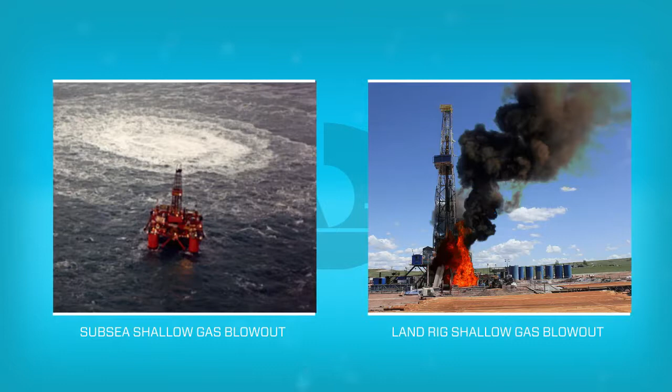Shallow gas blowout can occur in the early stages of drilling, even before the BOP has been installed. The picture on the left is of a rig that had a shallow gas blowout in the North Sea, and the picture on the right shows a gas blowout on a land rig.

In April 2010, the Deepwater Horizon rig suffered a blowout in the Gulf of Mexico, where an uncontrolled release of gas caused the rig to catch fire and sink. 11 personnel on board the rig lost their lives, and an unprecedented amount of damage to the environment was caused by the oil released from the well into the Gulf of Mexico.

The International Association of Oil and Gas Producers, IOGP, produced a document number 476 with recommendations for the enhancement to well control training, examination and certification. This document outlines the recommendations for the standard of well control training in the industry in order to help prevent future disasters from happening.

We will now describe some of the main topics associated with well control.

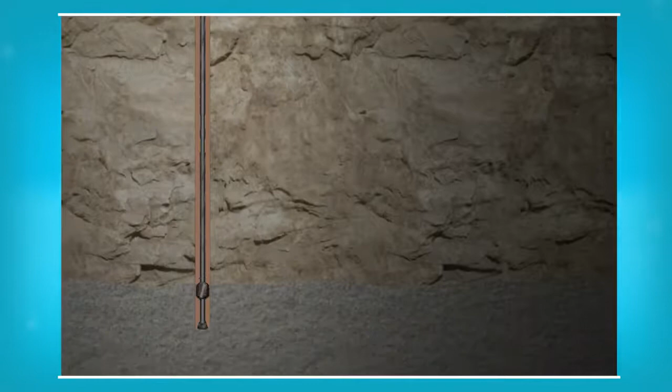In the wellbore, gas, oil and water are held in the pores of the rocks. To prevent these escaping, drilling fluid is used in the well. The density of this fluid is carefully calculated to be high enough to hold back the formation pressure and low enough not to damage the formation. This is known as hydrostatic pressure.

The fluid is constantly being circulated and monitored while drilling. The weighted fluid is classed as the primary well control. If the hydrostatic pressure gets too low, below the formation pressure, the gas, oil or water can escape into the wellbore, posing a potential threat to the well and the rig. This is known as a kick.

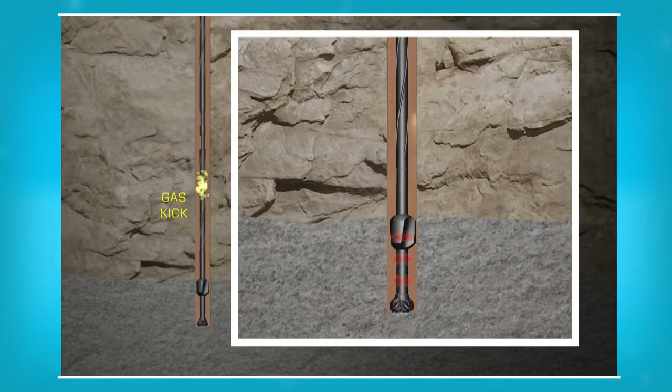There are warning signs at the surface, such as increased return flow rate or an increase of drilling fluid in the fluid tanks. We need to minimize the size of the kick by closing in the well as quickly as possible.

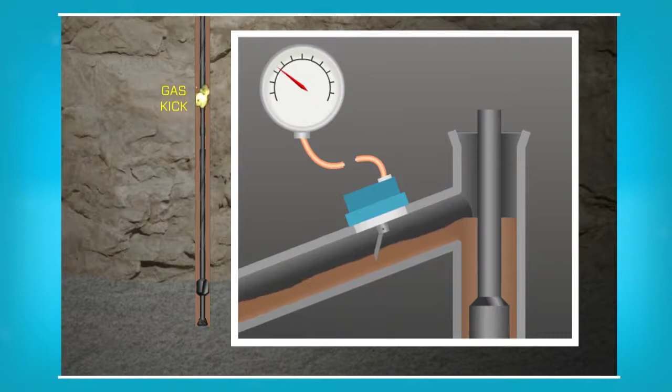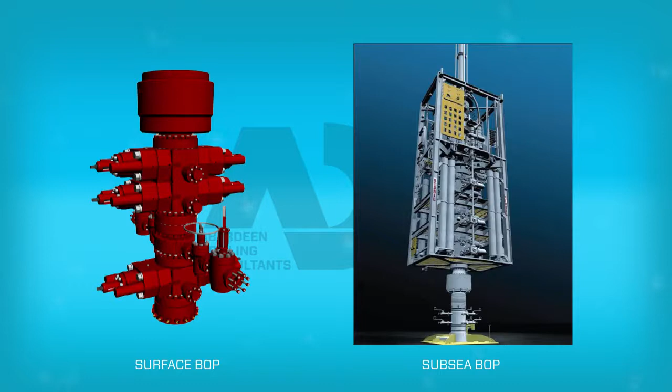If a kick is detected or suspected, the secondary well control is used. The blowout preventer, BOP, is used to shut in the well. The BOP is a large stack of valves. These are closed to seal the well. The BOP has choke and kill lines which are used to monitor and control the pressures of the well.

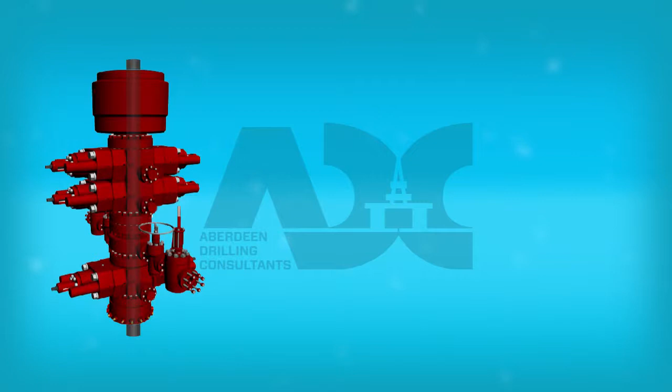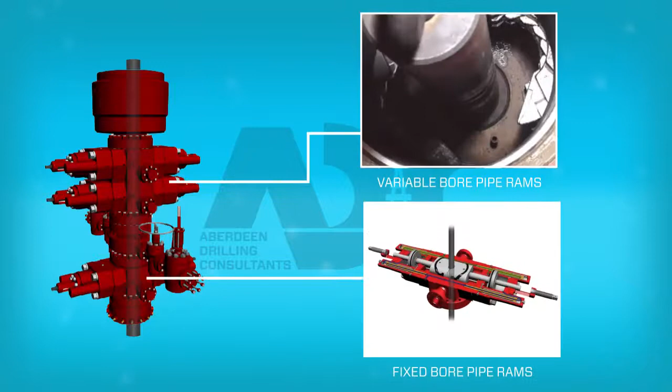The blowout preventer has various equipment for closing in the well. It has an annular preventer which can close around different sizes of tubulars, fixed or variable size pipe rams for closing around drill pipe, and blind shear rams which can cut through the tubulars in an emergency and seal the well.

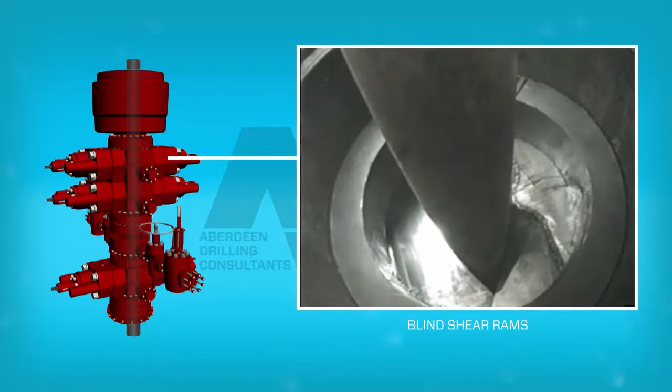Once the rams are closed, they have a locking device that holds them closed in case the hydraulic power is lost. To shut in and seal the well, the annular preventer is closed around the tubular. To further seal the well, the pipe rams are then closed.

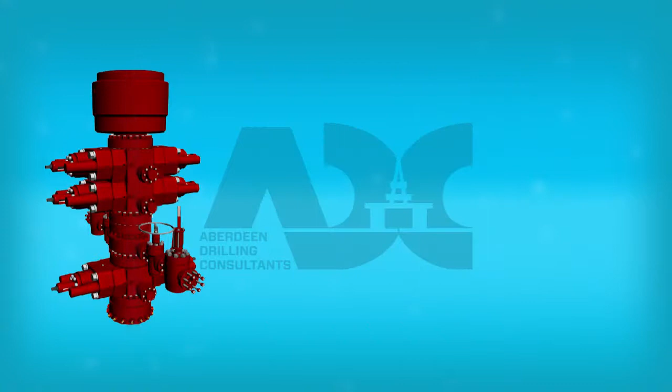We also have to close in the drill string so no fluids can escape up through the tubulars. To stop the flow up the drill string, a drill pipe safety valve is installed on top of the tubular. Once tightened, the ball valve can be closed using a special Allen key to seal the drill string.

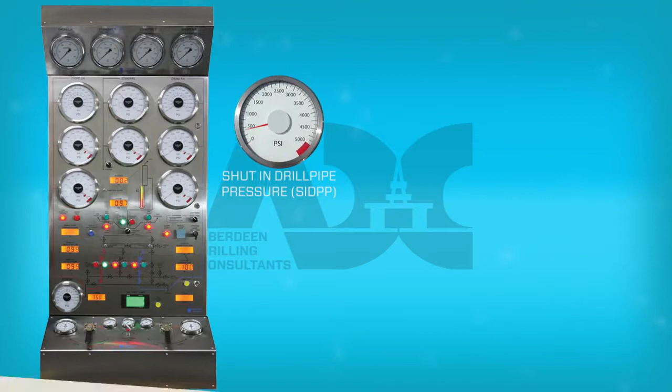Now that the well is shut in, certain values have to be taken to be able to calculate the required information to kill the well. This is done by reading the shut-in drill pipe pressure, SIDPP, and the shut-in casing pressure, SICP, from the gauges on the choke panel. The amount of fluid gained is also recorded, and this information, along with the well information, is inputted onto a kick sheet.

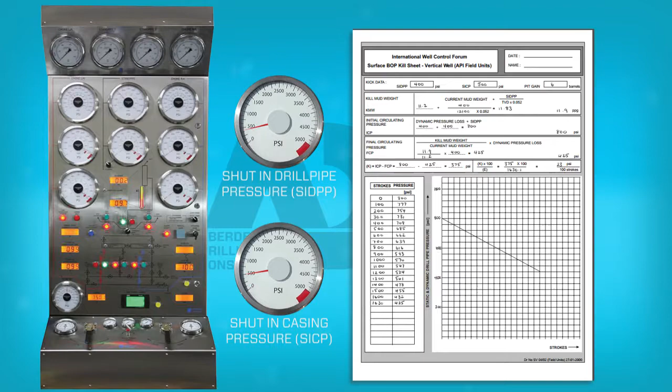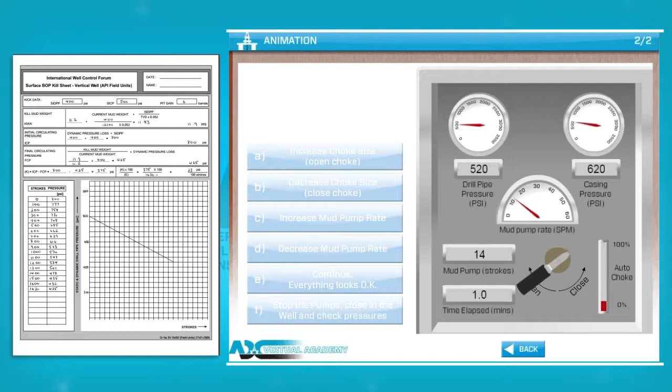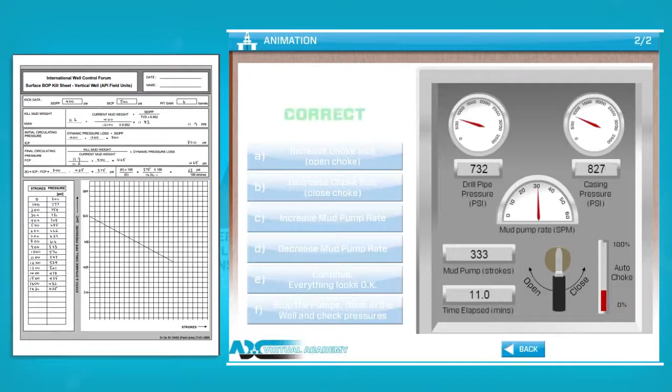This calculated information is then used to kill the well with the weighted kill fluid. To kill the well, we now use the values taken from the kick sheet. In this example, we are using the wait and weight kill method. This is done by following the graph on the kill sheet. This graph represents the kill fluid being pumped from the surface to the bit. The pressures are maintained by operating the choke on the choke manifold, which is being controlled from the choke panel in the driller's control station.

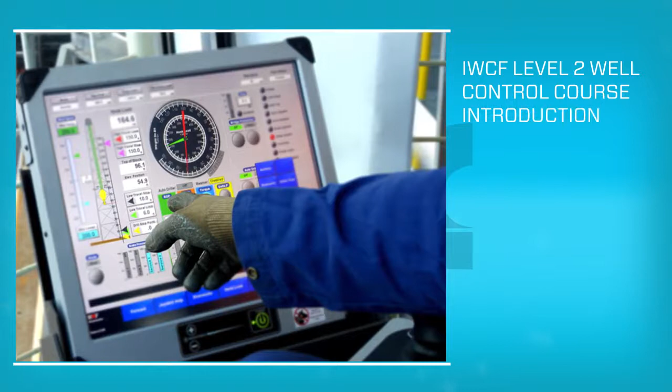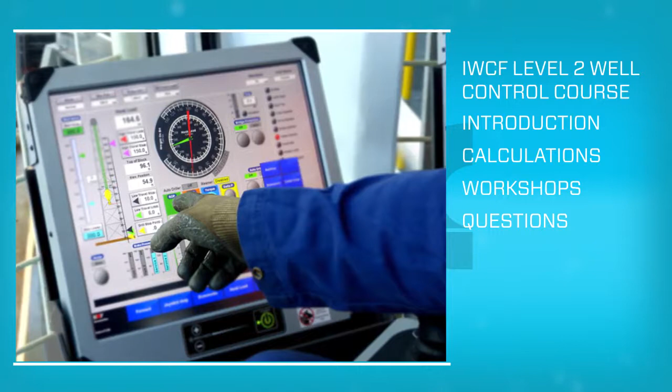The Aberdeen Drilling Consultants IWCF Drilling Well Control Level 2 course is broken down into multiple parts: introduction, calculations, workshops and questions. The course finishes with questions covering equipment and principle and procedures. Upon completion of the online course, the learner can take a final exam in any of Aberdeen Drilling Consultants associated centres and obtain the IWCF Level 2 certificate.